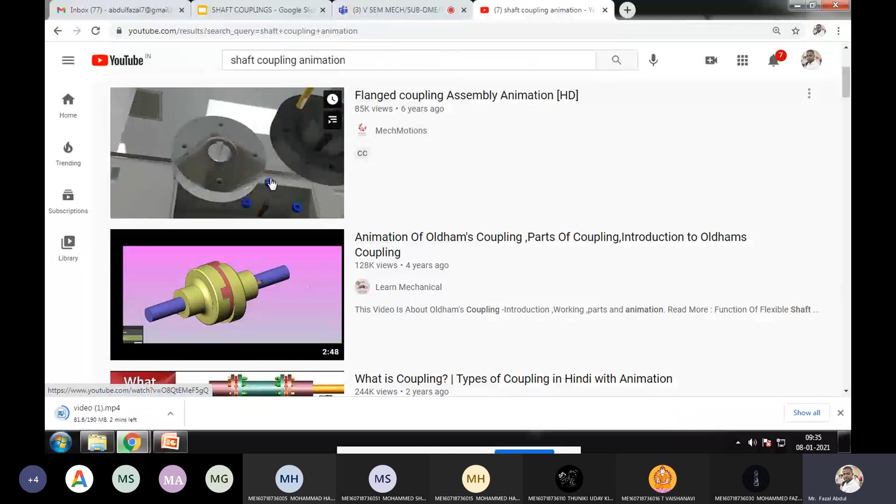So no need of voice audio here, just see the animation video.

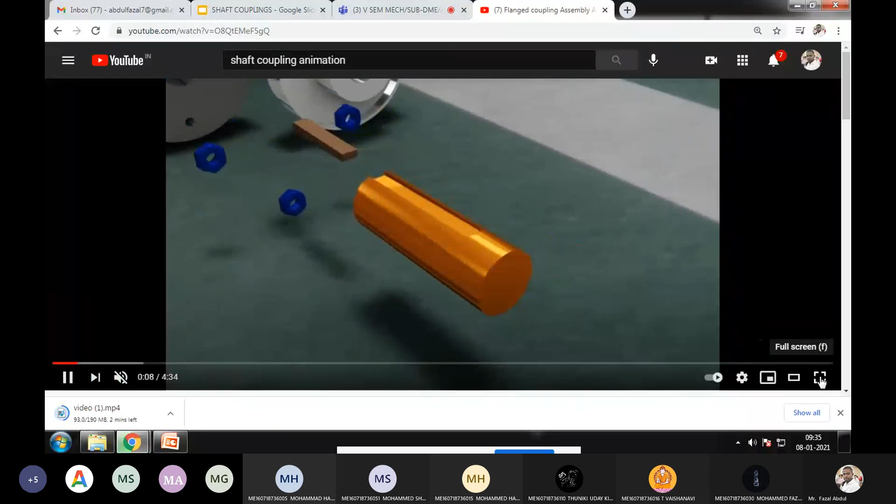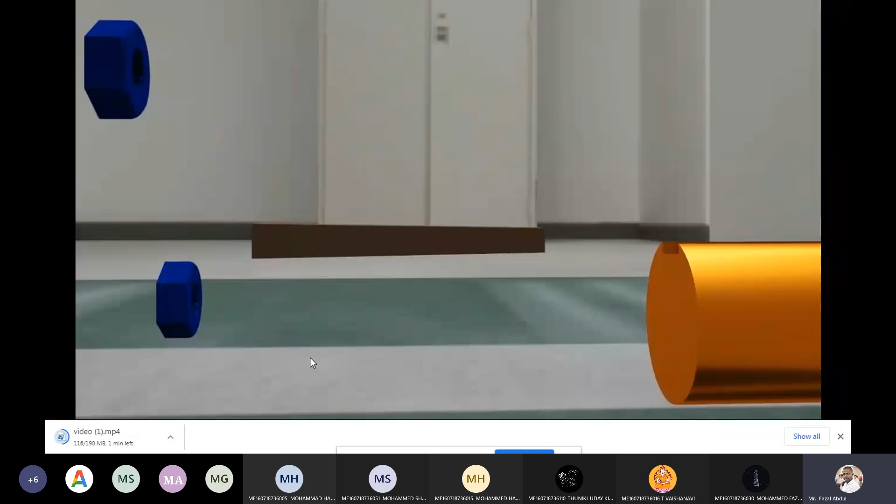This is the shaft, this is the key. See the shape of the key, it is a tapered key. The shape is appearing tapered.

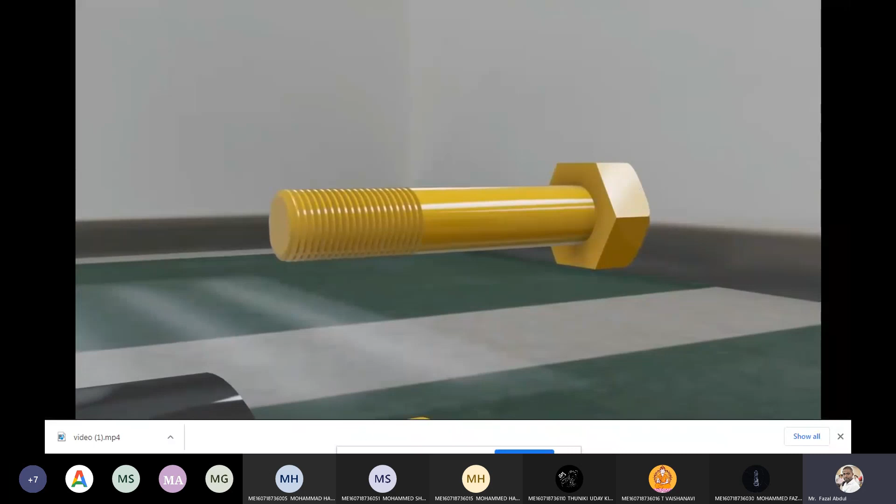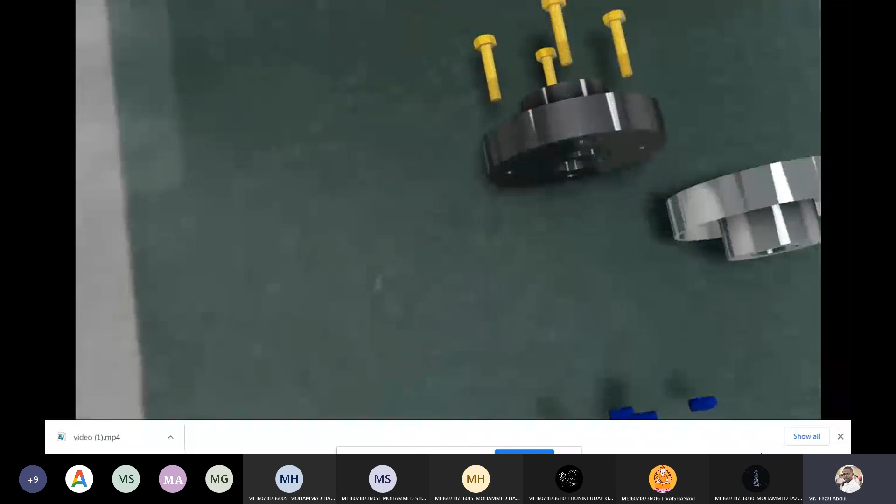Now see how it is going to assemble. These are all the parts separately, it is showing how all the parts are going to assemble. First the shaft is inserted in the flange, then the key is inserted in another flange.

See how the key is inserting, like this. The key is inserted.

Now in the same manner for the other flange. Here two flanges are there, this is one flange, this is the other flange. The shaft is inserting in this one. After inserting the shaft, the key is used here to make a joint between these two.

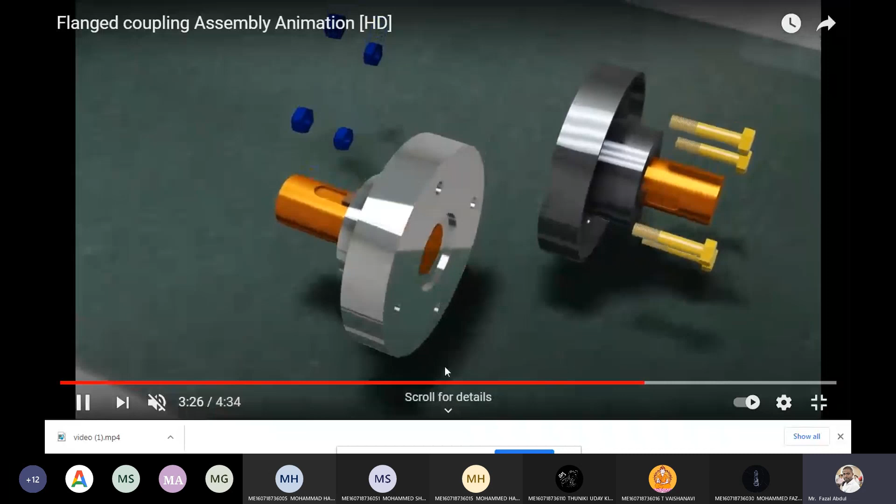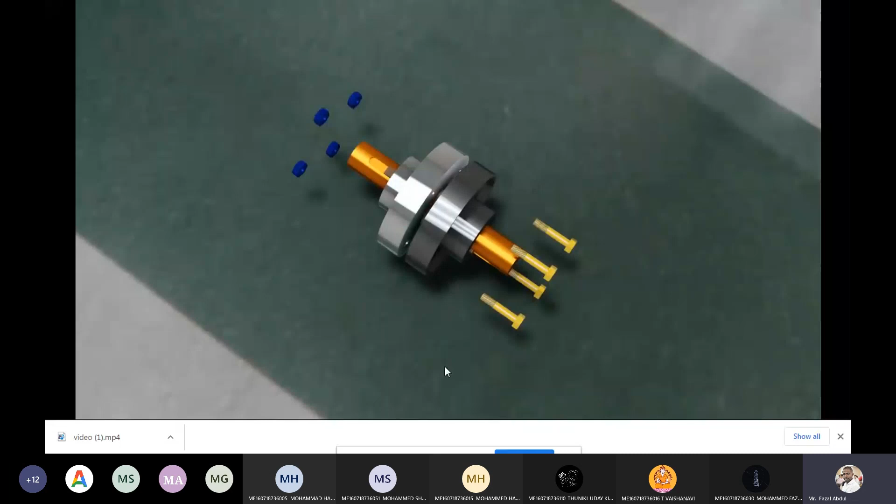See, the key is inserted between the keyway provided between the flange and shaft. Now both are assembled, now the two flanges are assembling. With the help of fasteners, nut and bolt, these two are going to assemble.

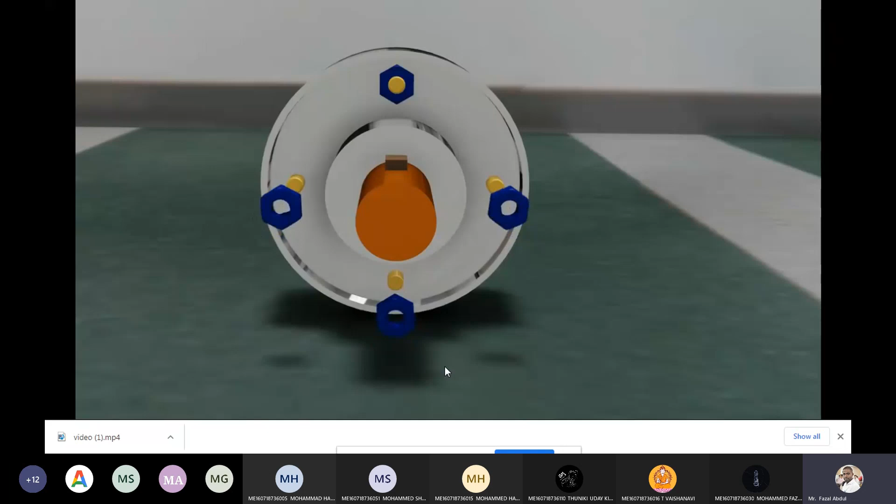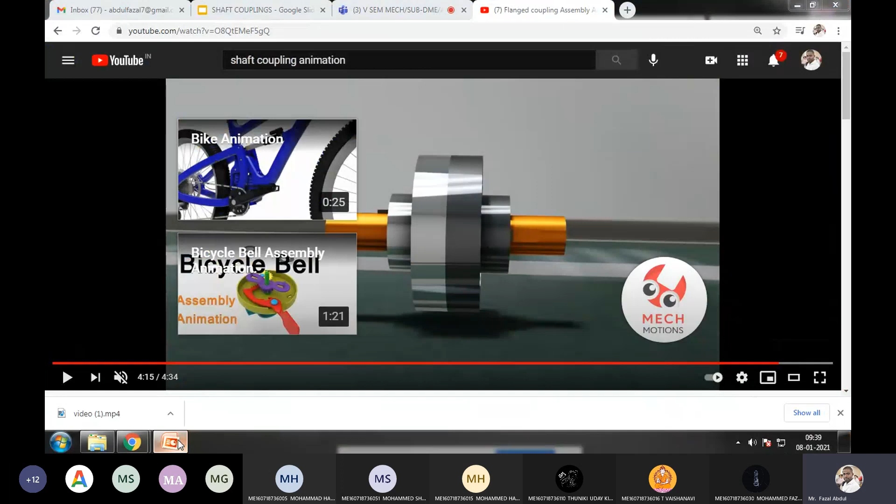So this is the total assembly of the coupling. Okay, so the shaft coupling, just now you have seen that animation video.

Generally, the purpose of the shaft coupling is that shafts are made not more than 7 meters because of inconvenience in transportation. Because if the shafts are larger in length, transportation becomes a major problem to transfer from the company to where the requirement is. This is more difficult. To overcome this difficulty, the shafts are manufactured up to 6, 7 meters.

Now whenever we require continuous larger length, we have to assemble the shaft. For this assembling purpose, to connect more than one shaft at the discontinuity, we use couplings.

So couplings are used here and they have several purposes in machinery. The first one is to provide the connection of shafts of units manufactured separately, such as motor and generator, and to provide disconnection for repair and alteration.

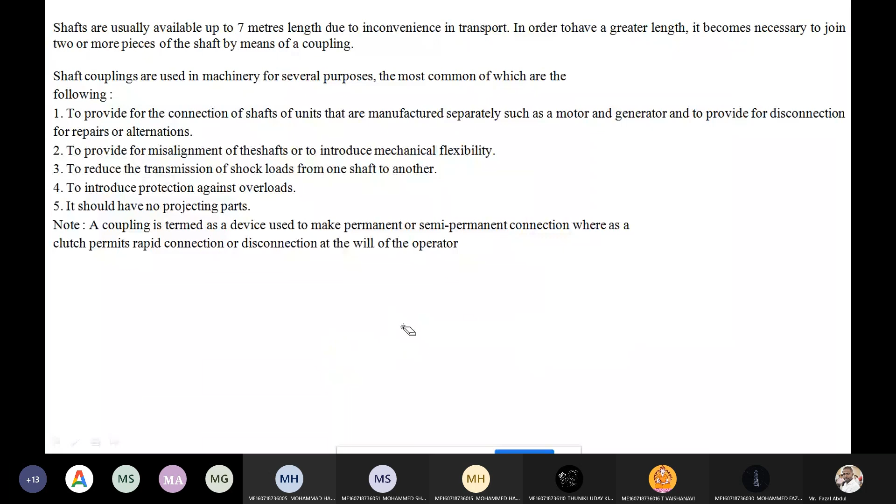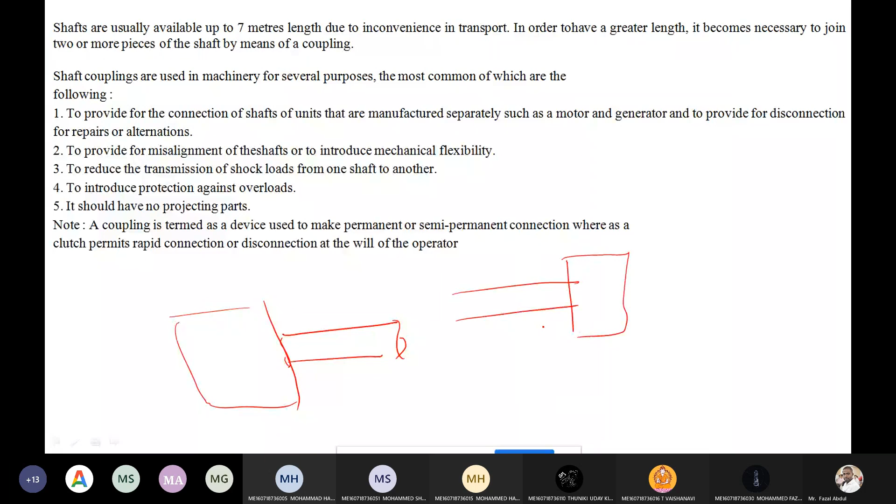Suppose this is one shaft, and this is another shaft coming from the motor, and this is another shaft connected to the generator. So we want to connect these two shafts. Is it possible to connect here? The position is not displaced here - this is the position of the generator, this is the position of the motor. Even though we have to connect these two shafts, at this situation, coupling is used to connect these two shafts.

So this connection is known as misalignment. Whenever there is a misalignment, we can connect the misalignments properly. This misalignment means, like, this is lateral misalignment, and somewhat angular misalignments are there. Generally you can find angular misalignments at the propeller shaft of the machine. So in such situations the couplings are used.

And these couplings are used to reduce whatever transmission shocks are generated - the transmission shocks are reduced with the help of this coupling. And whatever overloads are there, those overloads are protected against with the help of these couplings.

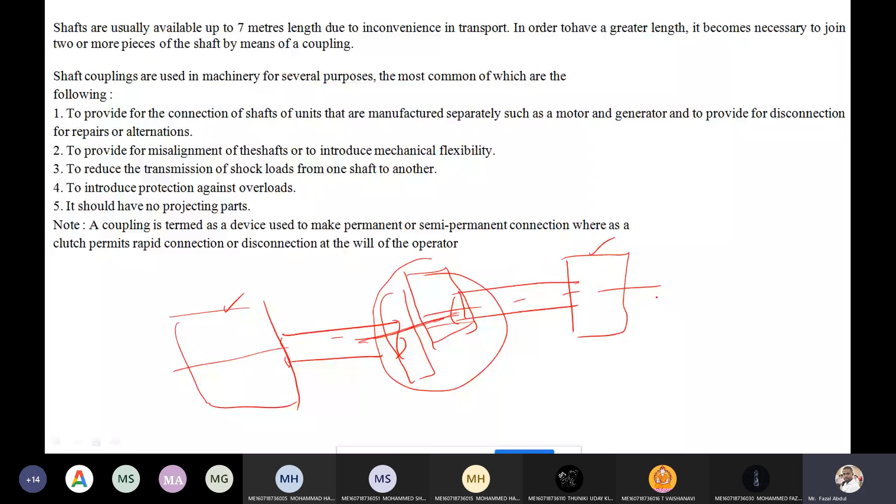So this is a brief introduction about the coupling. As per your syllabus, these are the types of coupling - first one is rigid coupling, second one is flexible coupling. As per your syllabus we are discussing.

So as per your syllabus, first one is rigid coupling. In this rigid coupling, these three types of couplings we need to discuss. And in flexible coupling, the bush pin type of coupling we need to discuss. So these two others are out of your syllabus.

So first one is rigid coupling. Rigid coupling is where we need to connect two shafts which are perfectly aligned. Perfectly aligned means, see here, this is one shaft, and this is another shaft.

So both shaft axes are collinear. At these situations, the connection is required. This connection is done with the help of rigid coupling.

This rigid coupling can be possible by the sleeve or muff coupling. Next, second category, clamp or split muff coupling or compression coupling. Then third one is a flange coupling. Just now you have seen the animation video about the flange coupling.

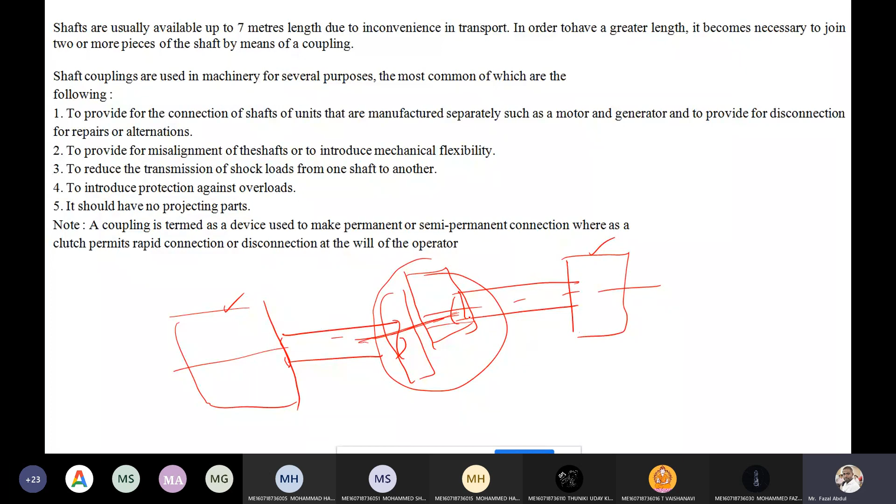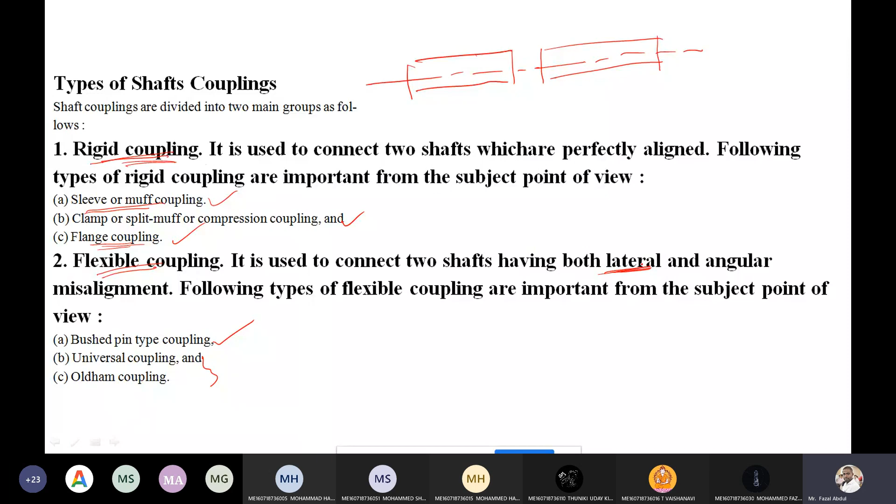So it is used to connect the two shafts having both lateral and angular misalignments. This lateral, just now I've shown, is the lateral misalignment and angular misalignment. Angular misalignment means in the universal joint of the propeller shaft, we can observe the angular misalignment.

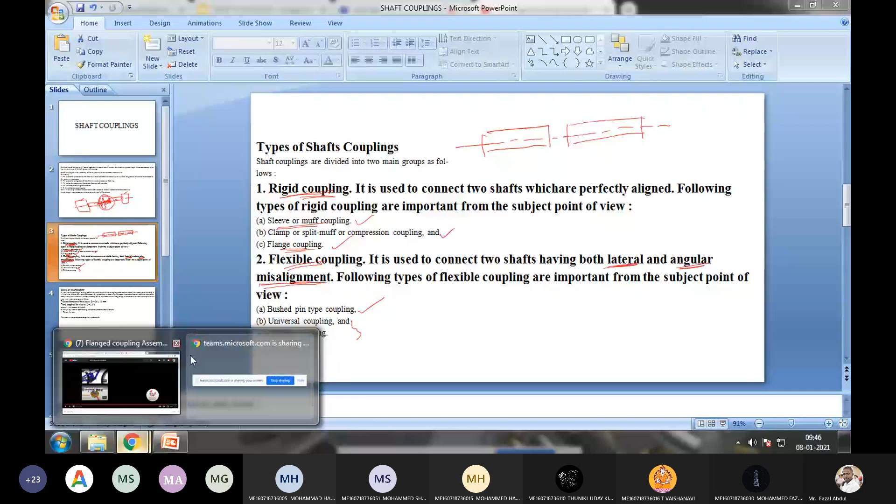Okay, so just wait, I will show how it appears. So this is the angular misalignment. This type of joint you can see at the universal joint at the propeller shaft. So this is the parallel, this is the angular, this is the combined one.

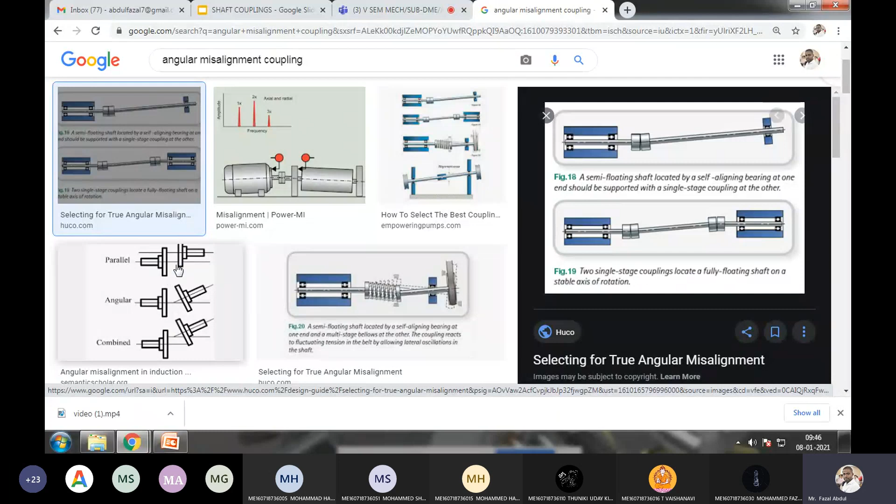So this type of joints can be possible by the flexible coupling. So in this flexible coupling, bush pin type of coupling you have, and universal coupling is not there, universal joint is there. And the Oldham coupling theory part you studied in the theory of machines.

So this is the topics you have in the design of shaft coupling. So here, whatever the topics are there, sleeve coupling, clamp or split muff coupling, flange coupling, bush pin type of coupling, entire design procedure you need to remember.

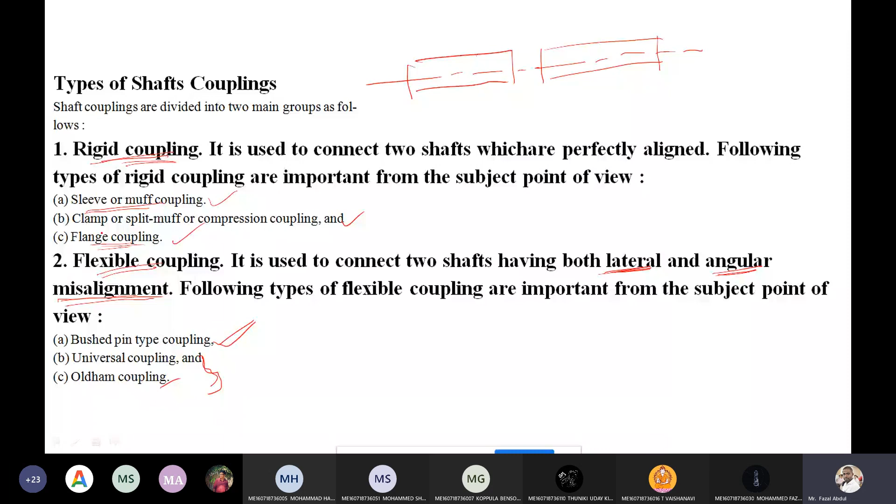I'm explaining the design procedure with one example problem. In examination, maybe they ask for the design procedure, otherwise may ask for problem solving. So in both cases, if you remember the design procedure, no need to practice the problem, because both processes have the same procedure. Okay, now today I'm going to explain the sleeve muff coupling.

Sir, which both are having the same procedure? Problem solving and derivation. Okay, sir.

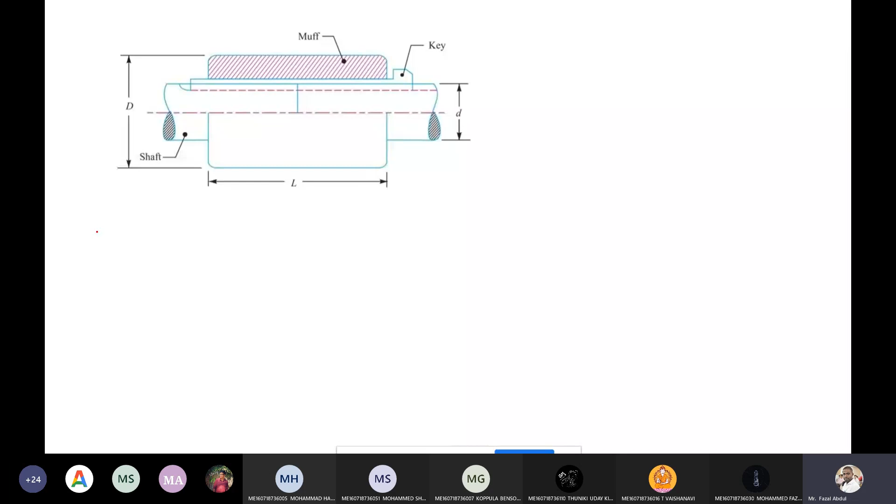So this is the sleeve muff coupling. The diagram is appearing, that is the sleeve and muff coupling, sleeve or muff coupling. Sleeve muff coupling is the simplest type of rigid coupling.

Just now I said this is the first classification, rigid coupling. So under the first classification, this is the muff coupling.

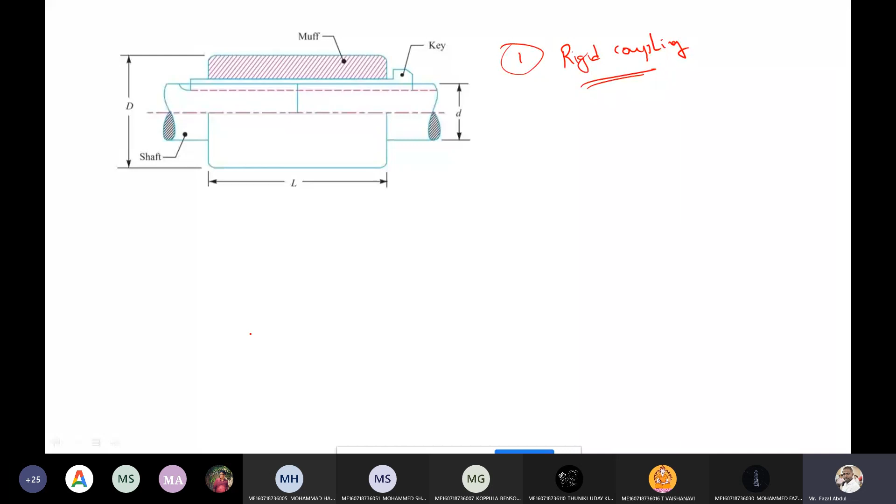It is made of cast iron. The material is cast iron, and it consists of a hollow cylindrical portion. So the outer one, muff, the hollow cylindrical portion, it is known as a muff or sleeve.

Whose inner diameter is equal to outer diameter of the shaft. It means the diameter of the shaft, the external diameter of the shaft, is equal to the internal diameter of the muff. It is fitted over the ends of two shafts.

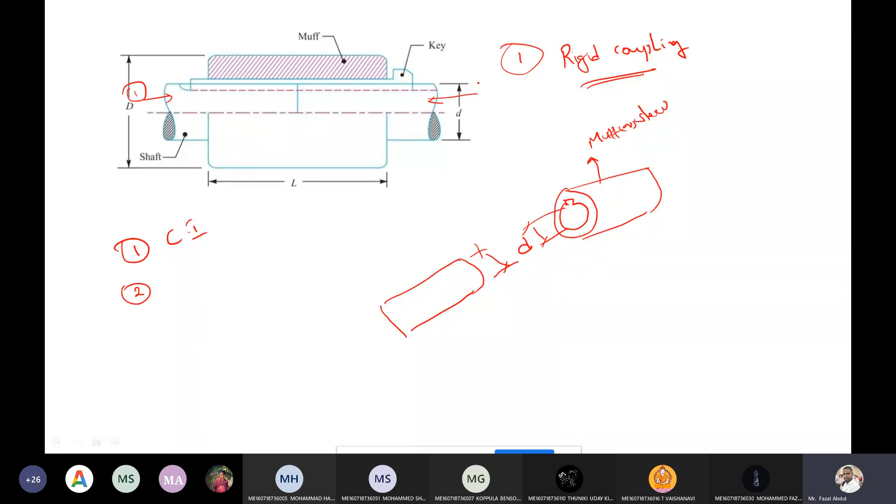So it means whenever we want to, this is the one shaft, this is the another shaft, whenever we want to connect these two shafts, welding is not possible.

If we do the welding here at this joint portion, what happens, whenever repair or alterations are generated in the machine, and generator or other place where power is generated or utilized, if problems are generated there and we weld this portion, during disassembly we'll get difficulty. So for that reason we are using the couplings here.

So whenever we want to connect the two shafts, at the end of the two shafts, the muff coupling is going to be placed.

The muff is placed such that from the right side of the muff one shaft is inserted, from the other side another shaft is inserted, and after insertion the key is inserted between these two elements, muff and shaft. The key is inserted from this side, another key is inserted from this side.

So the keys we are using here, that is a gib headed key. See here the shape is appearing, gib headed key.

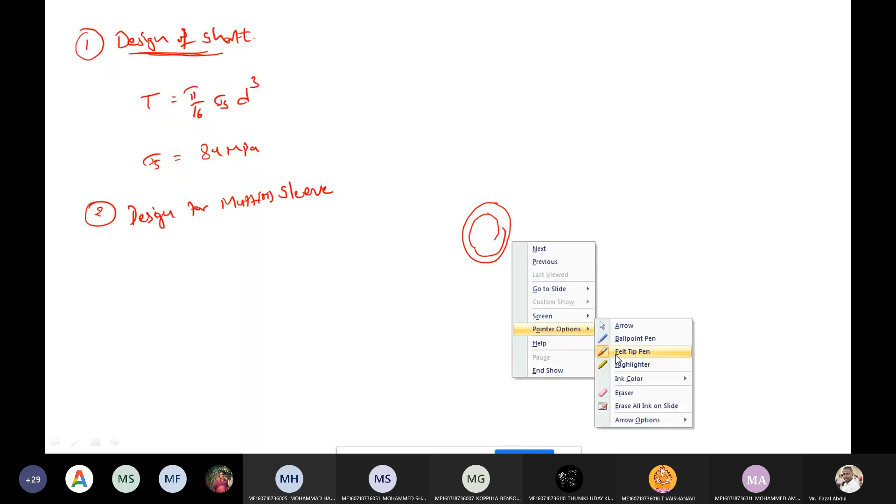Now the second thing is design for sleeve or muff. Sleeve portion I'm drawing here. Sleeve is having the hollow cylindrical portion, and one keyway is provided always. I'm drawing here.

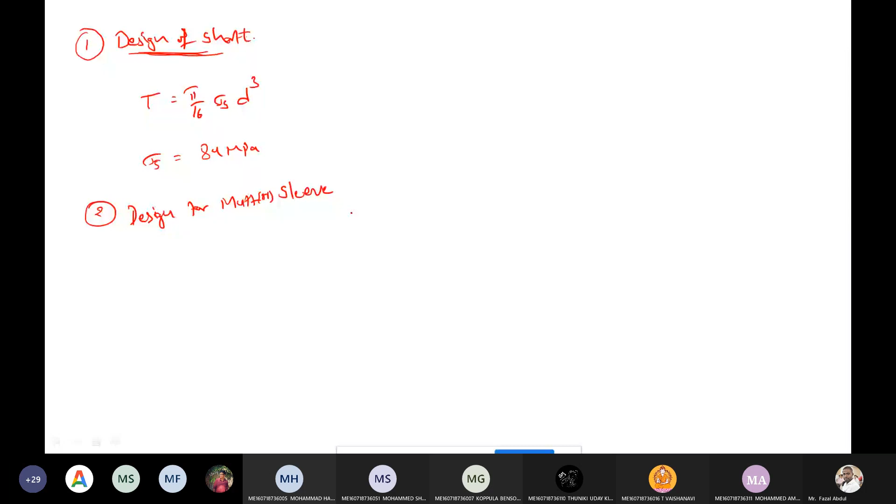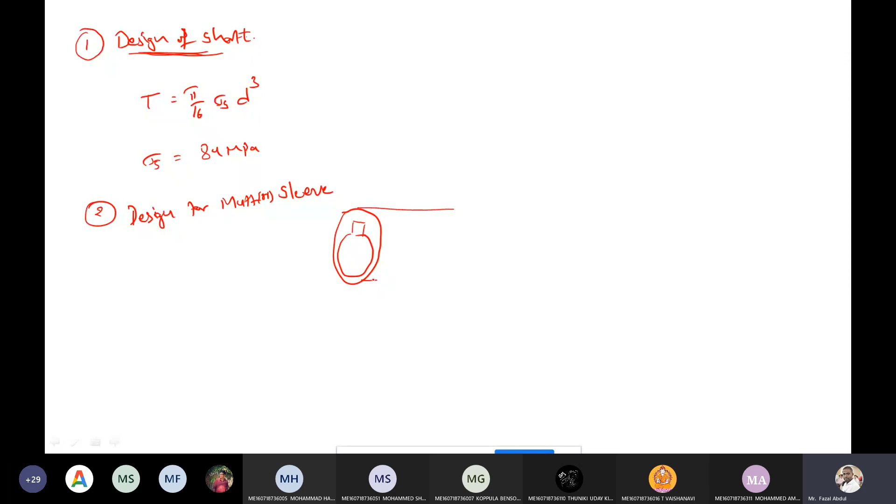So this is the muff or sleeve. We are designing now this one. So the purpose of this joint is to make the two shafts assembled, and torque is going to transmit from the one shaft to another shaft. So the reason I'm taking this equation.

T equal pi by 16 into sigma s into d naught cube minus d naught power 4 minus di power 4. This equation I'm taking. Why? So this muff is nothing but a hollow cylindrical portion, nothing but hollow shaft. So for the hollow shaft, what is the equation? For the solid shaft, this is the equation. For this hollow shaft, this is the equation.

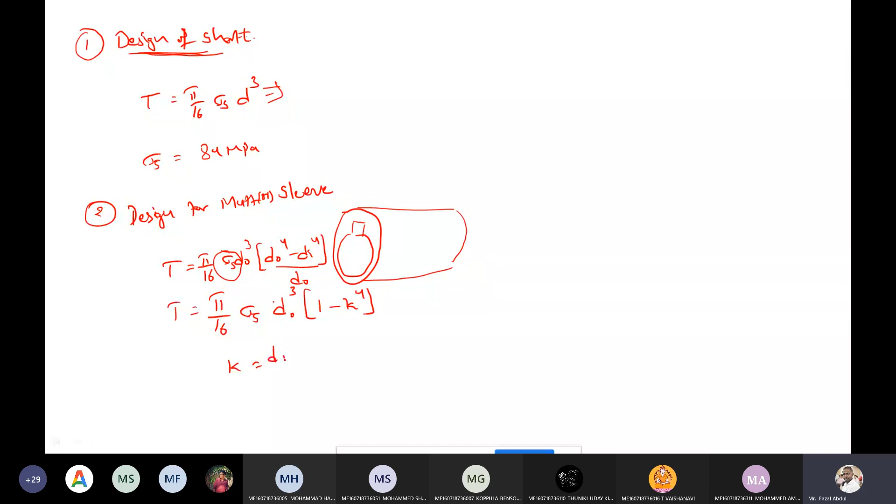Here the coupling is used to transmit the torque from one shaft to another shaft. So the failure is going to take place in shear. So for that reason I'm taking this equation. This equation we can also write as T equal pi by 16 into sigma s into d naught cube into 1 minus k power 4, where k is the diameter ratio, that is di by d naught.

Where d naught is the external diameter, its value is 2d plus 13 mm. So this value, at any cost, we need to remember this empirical relation. Now the design for sleeve is over. Now third is design for key.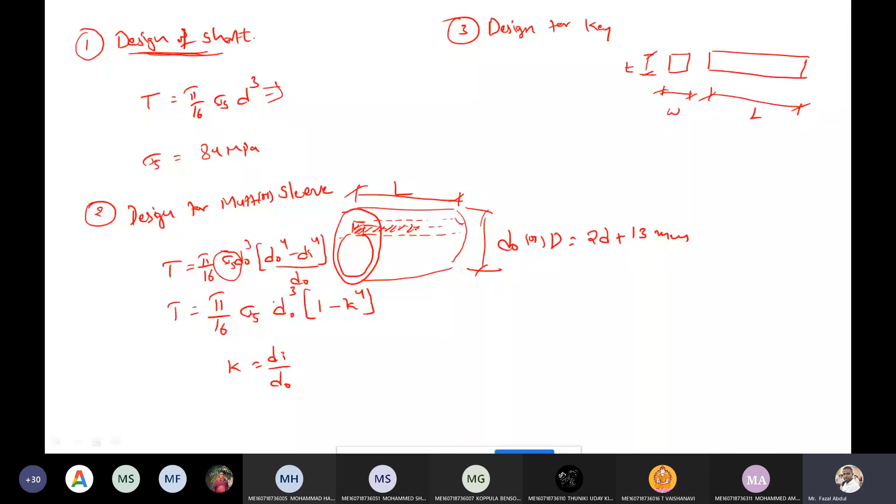First we need to calculate the dimensions. The key coupling is designed in a similar way. The length of the key has to be maintained the same as the length of the muff, because whenever assembling is done, the keyway is provided along the entire portion, so the key must cover the total portion.

Here two shafts are inserted, one from this side, another from this side. So the length of the key is half of the length of the muff, because one key is inserted from this side and another key from this side.

So what is the length of the muff? The length of the key is 3.5d by 2. Now what is this? 3.5d by 2 equals 1.75d. So the length of the key is 1.75d.

Now designing strength-wise. Generally keys fail in two criteria: one is the shear criteria, second one is crushing. We discuss both of these in the design of keys. So if it fails in shear criteria, how it fails, I will show you here.

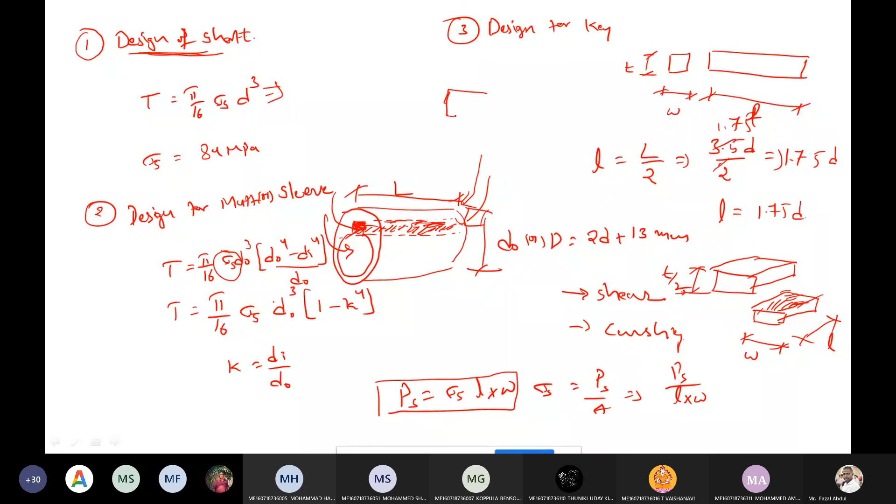So this is T by 2, another T by 2. Half of the portion is located in the muff and half is located in the shaft. This is the total length of the key, and this is the width of the key. So when it fails in crushing, this portion crushes, and another portion crushes on the other side of the key.

So what is the crushing area? The crushing area is L into T by 2. The crushing stress equals crush load by area, that area being L into T by 2. So the crushing load is crushing stress into length of the key into thickness by 2. This is the strength of the key in crush criteria.

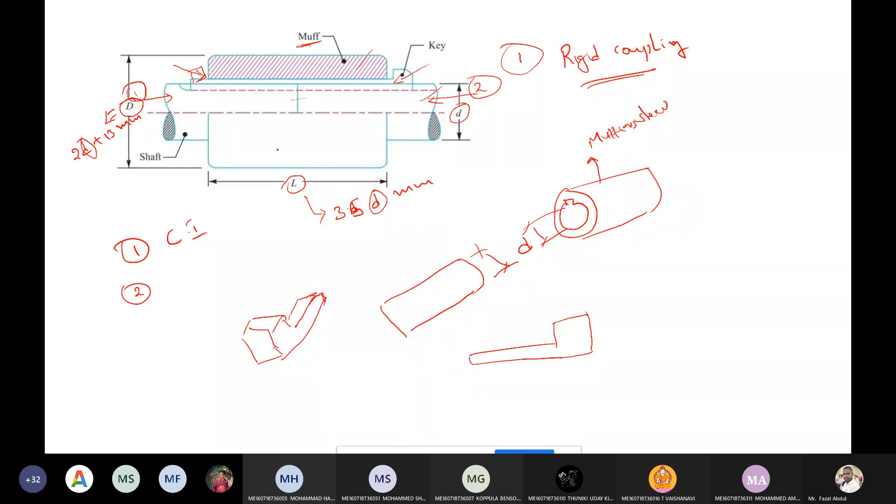This is the procedure for how I solved the entire problem. The same procedure applies for solving other problems. This is the design procedure for the sleeve muff coupling. Whenever a question is asked in examination to write the design procedure, you need to draw this diagram neatly and explain each and every step: first design for the shaft, design for the muff, design for the key, and so on. Each and everything you have to explain.

Okay Babu, in this design procedure, if you have any doubts you can ask. Sir, where is the crushing load equation?

This is the one. Just now we derived it. If it fails in crushing, this is the equation. If it fails in shear, this is the shear equation.

These are two empirical relations you can find here. One is capital D equals 2d plus 13 mm, and the length of the muff is 3.5d. This relation you need to remember, Babu. Okay, shall we move to the problem if you don't have any doubts?

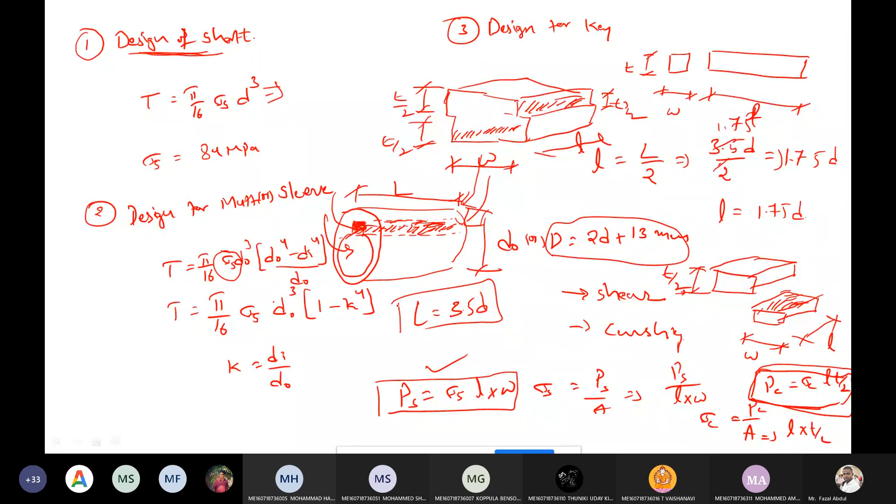So here's the question: design and make a neat dimensioned sketch of a muff coupling used to connect two steel shafts transmitting 40 kilowatts power at a speed of 350 rpm, with the material for the shaft and key being plain carbon steel.

The material given is most important, Babu, for selecting the stress values. By seeing this material only, we select the maximum permissible stress value. If the stress values like 40 megapascal and 80 megapascal are not given in the question, how do we select them?

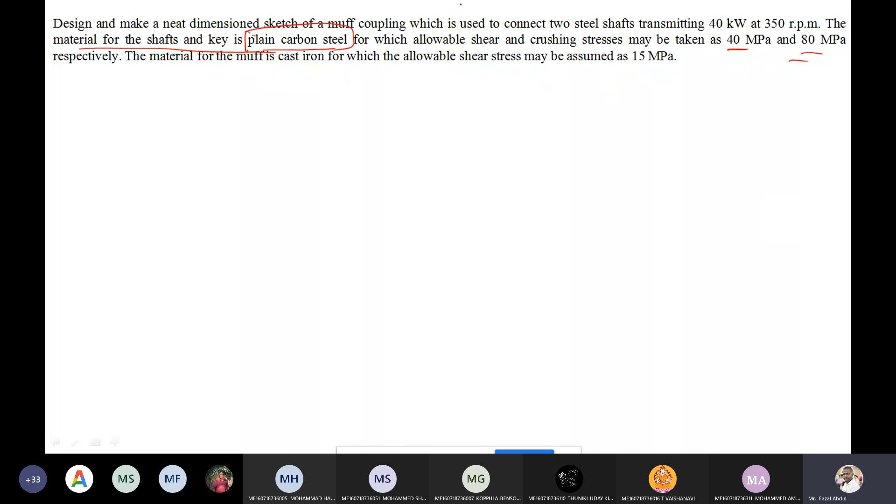By seeing the material name, plain carbon steel, we take the material properties like 40 megapascal and 80 megapascal. So here the material for the shaft and key is plain carbon steel, for which allowable shear and crushing stresses may be taken as 40 and 80 megapascal respectively. The material for the muff coupling is cast iron, for which the shear stress property is 15 megapascal.

First write down the given data.

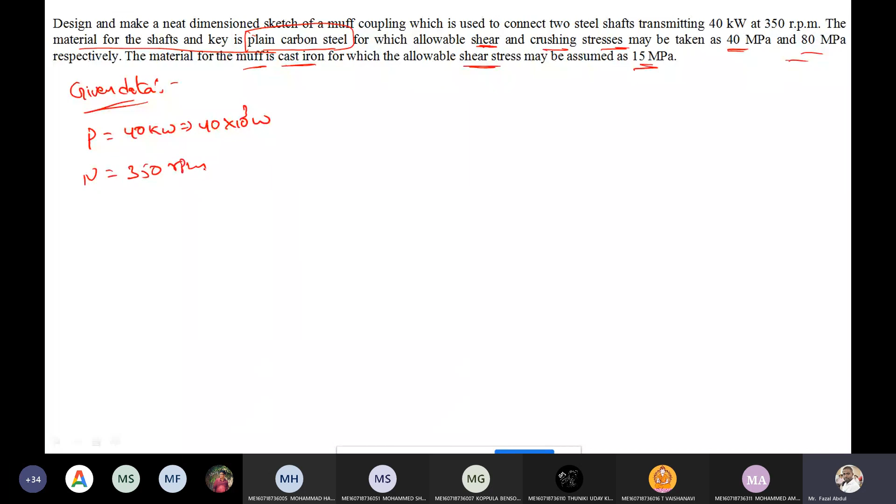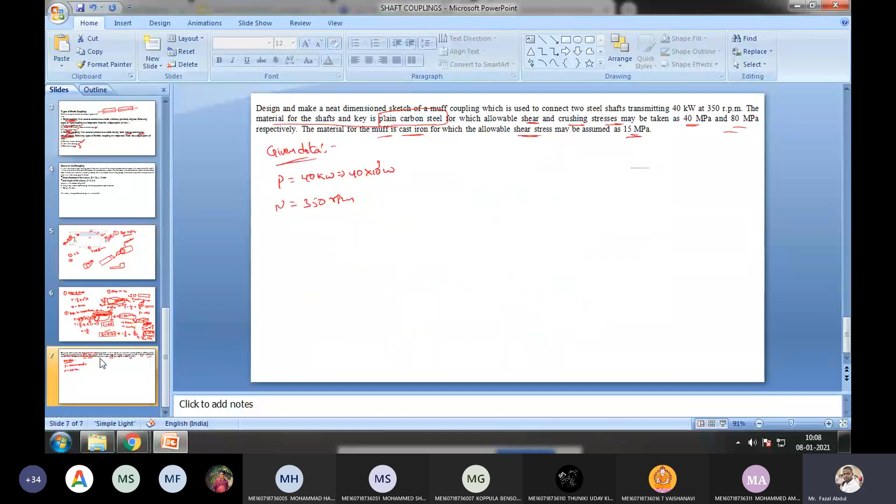Power is 40 kilowatts, that is 40 into 10 cube. Speed is given as 350 rpm. The material is plain carbon steel, for which shear stress is 40 megapascal, or we can write it as 40 Newton per mm square.

Now crushing stress is 80 megapascal, or 80 Newton per mm square. This material and property are for the shaft and key. For the muff, the material is cast iron, with property sigma s equal to 15 megapascal. Now we are calculating the design.

The question is to design the muff coupling. First, in the design procedure, what we calculate is the design for shaft. So before calculating this, we need to first calculate the empirical relations, meaning the dimensions of the coupling.

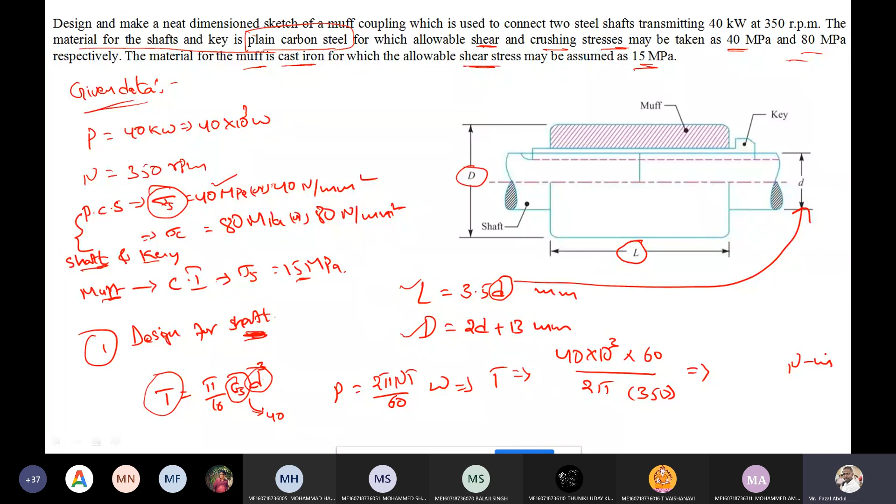Now we have one relation from the power equation, P equals 2 pi NT by 60 watts. So T equals, in this, P value is 40 into 10 cube into 60 by 2 pi into N, 350 as given in the question. Now what is the value of torque in terms of Newton meter? Tell me that value.

Absent is, and absent is Lera.

Tell me the T value, Babu.

Substitute the torque value here. Now you will get the diameter in terms of mm. Remember, all dimensions of this figure should be in mm only. That's the reason I'm converting each dimension into mm. Observe here, in the empirical relation, L value appears in mm, D value appears in mm. For that reason all dimensions related to this figure should be in mm. So get the D value in terms of mm.

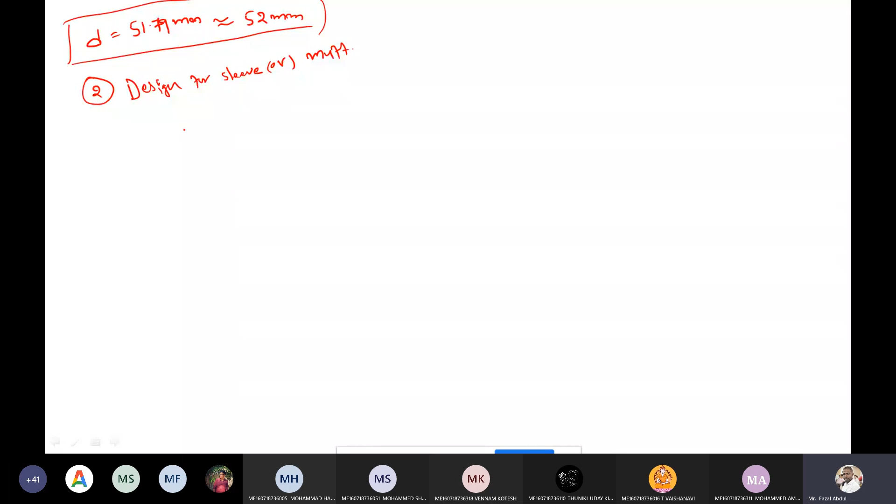Now remaining two parts are there. What is the second part here? Design for sleeve. Design for sleeve or muff. Muff and sleeve both have the same meaning, Mago. So design for muff, what is the design procedure?

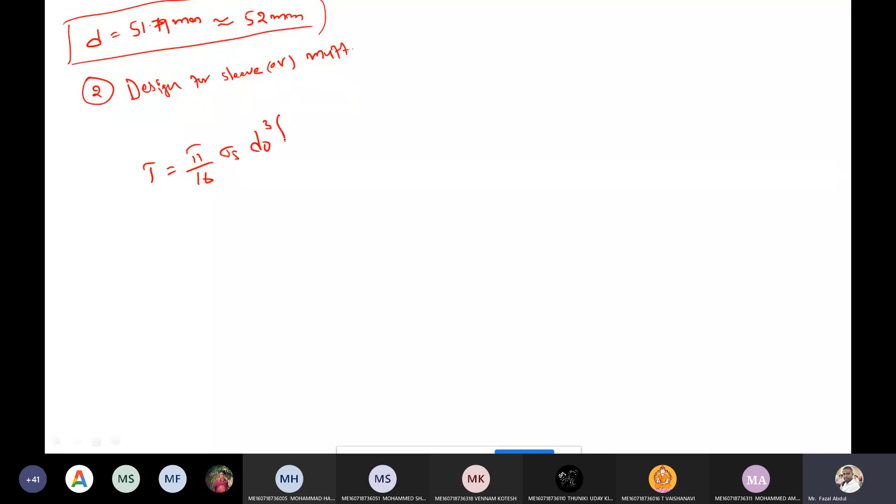The design procedure is T equal pi by 16 into sigma s into d naught cube into 1 minus k power 4. So what is k here? K is nothing but di by d naught. Di is nothing but the inner diameter of the muff, okay, and d naught is the outer diameter. So d naught we just now calculated.

What is di? Did we calculate it just now? What is di? Anybody? I'm expecting the answer from the students. What is di? D naught, just now we calculated here, 117. Capital D is nothing but D naught. Now I'm expecting the answer from the students. What is the DI? Where can we find it?

Please respond to my question whether you know or don't know. What is DI? From where can we get the DI value? The simple logic, Amma: inner diameter, inner diameter. Shaft diameter, something, sir. Very good. Shaft diameter is, very good. See here, inner diameter of this muff and outer diameter of the shaft both are equal.

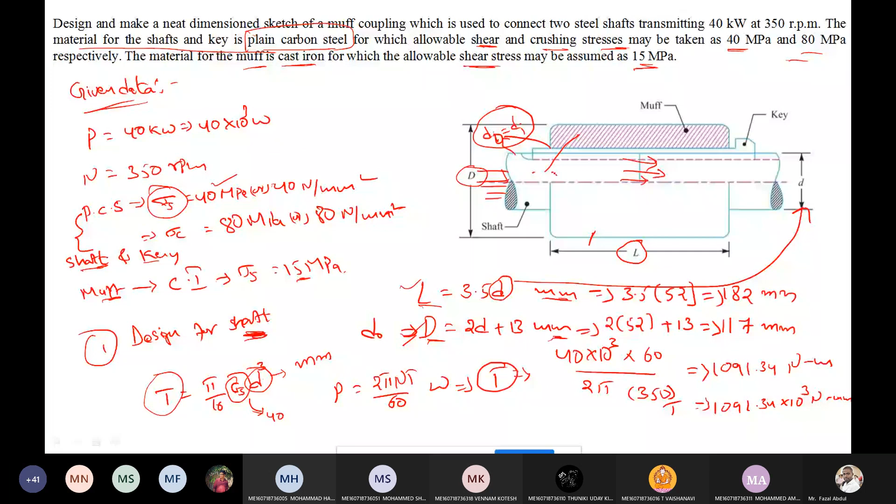First it transfers to the muff. The torque first transfers to the muff. Then this muff is going to transfer the torque to this one with the help of this key. It means however much torque is generated on this shaft, the same torque is carried by the muff, same torque carried by the other shaft. It means, can I write this torque here? Can I say this torque value is the same as the shaft torque? How much did we get here? 1091.34.

1091.34, is it right? Whatever the torque, what is the basic purpose of the coupling? To transmit power and assemble two dissimilar shafts, transmitting power from one shaft to another. So whatever torque is carried by the shaft, the same torque is carried by the muff. Okay, so this is the one.

1091.34 equals pi by 16 into sigma s into d naught value. How much is d naught? D naught is 117. 117 whole cube into 1 minus 0.44 power 4. Now we will get the sigma s value.

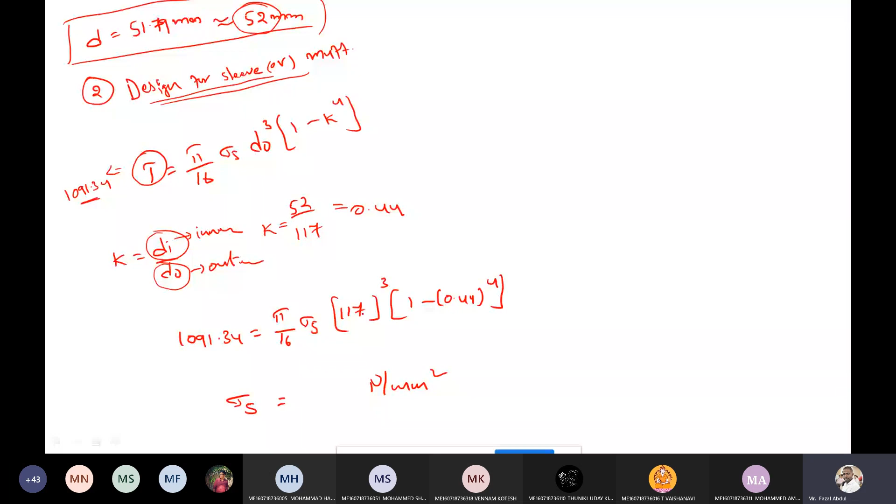The answer should be in terms of Newton per mm square, because we are substituting the values in mm. This torque value also we need in mm, so multiply by 10 to the power of 3. Now the torque value is Newton mm. So all are in mm, so that's the reason the sigma s value should also come in terms of Newton mm square.

Now tell me the sigma s value, make it fast, we don't have time. Only one person is interacting in the class, the rest are sitting idle, no one is discussing.

3.60. 3 point how much? 3.60. 60 Newton per mm square.

Now see why we calculated this. You may get this question, sir, since it's already given that sigma s for the muff coupling is 15 megapascal, as shown in the question. Why did I calculate it again? Because whatever design of the shaft you selected previously, that value is taken here for the design of the muff. Whatever previous values you got are under safe condition, but you have to check whether it is under safe condition or not. For that checking purpose only, I calculated sigma s here.

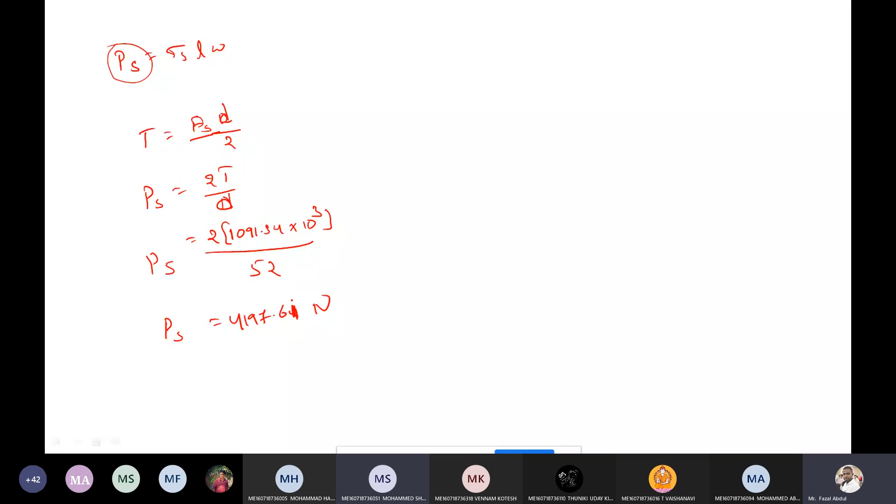41974.61, sir. Units is newtons. Now you got the PS value, substitute here. PS value, sir, 41974.61.

74.61 equal sigma S value. Sigma S value we don't know, it is not given in the question. We have to calculate the sigma S value. We are designing for strength wise now, meaning first we need to calculate the sigma S value here and compare with the given data. If the values are less than the permissible value, then our design is safe.

Now sigma S into L value, how much we got? L value, where is L? L is 91. And W, how much we got? W value is 13 mm.

Now what is sigma S? Make it fast. 35.48 Newton per mm square. Now see here, sigma S value we got 35.48. Question is given shear stress. Sigma S value how much given? 40. It means our design is safe.

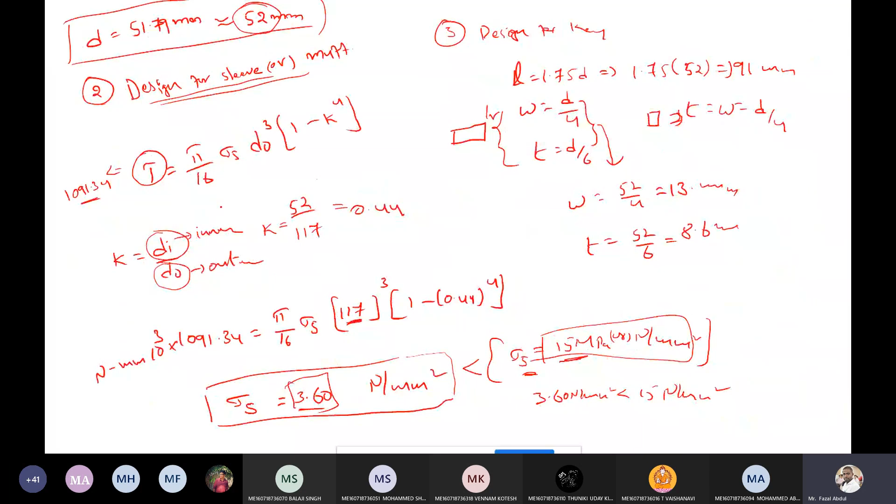Question value permissible limit given. In the question, permissible limit is given for the key value 40 megapascal, but we got 35.48 megapascal. It means the calculated value is less than the permissible value, so our design is safe under shear condition.

Now in the same manner we need to calculate the crushing: PC equal sigma C into L into T by 2. PC value is same, and sigma C value needs to be calculated separately. After calculating sigma C, we need to compare with the permissible value. How much given in the question? 80 megapascal. If our calculated value is less than this permissible value, then design is safe.

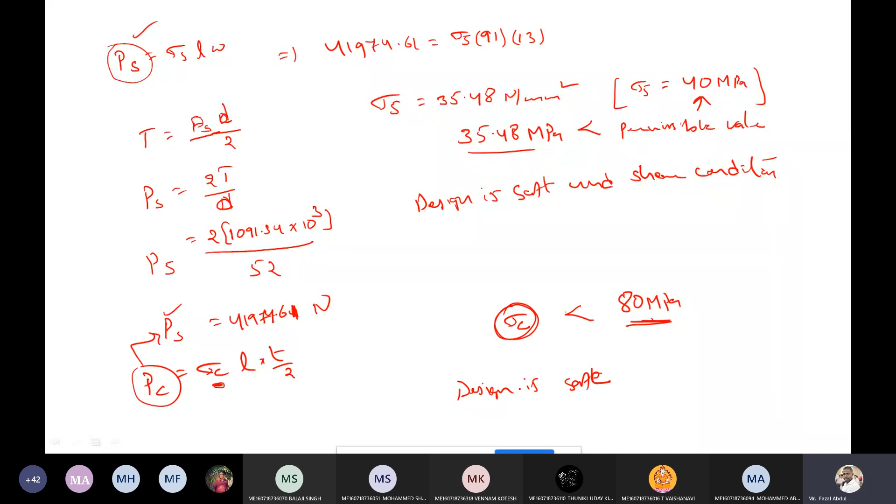So you people calculate the sigma C value. PC is same as this one. L value already we calculated, T value also already we calculated. Then get the value of sigma C, compare with the permissible given value, and write the comment. Okay, regarding this problem, any doubts, Babu?

Today we completed the muff coupling. In next class we are going to complete the compression coupling.

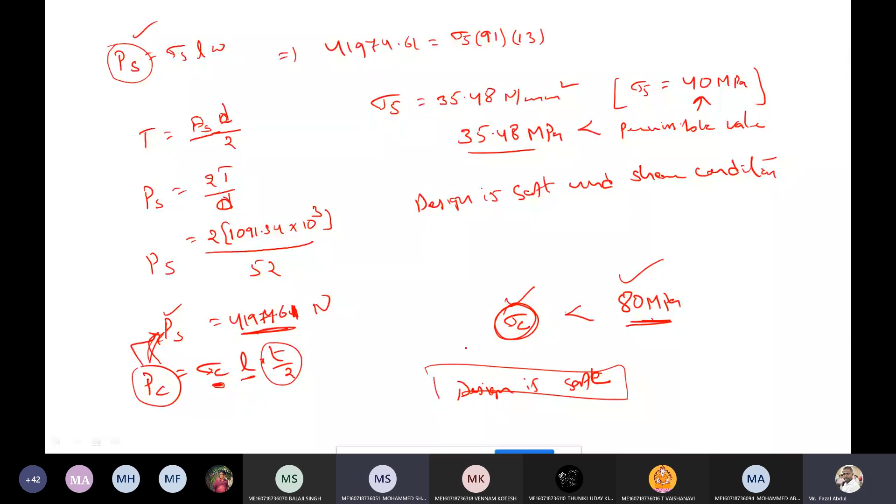Sir, we have to draw a diagram also, right? Yeah, we have to sketch. After getting all the values and the safe conditions, you need to draw the diagram with a neat sketch with pencil and show the dimensions: how much L value you got, how much D value you got, how much this D value you got. Each and everything with the pencil only. You have to write the values, and at the bottom of the diagram, write the comment: all dimensions are in mm. If you forget drawing this sketch, you will simply lose 5 marks.

Remember this point, okay Babu. So here, whatever the design procedure I explained, in the same manner the problem also got solved. It means if you are perfect with the design procedure, no need to practice the solving of the problem separately. Is it right, Babu?